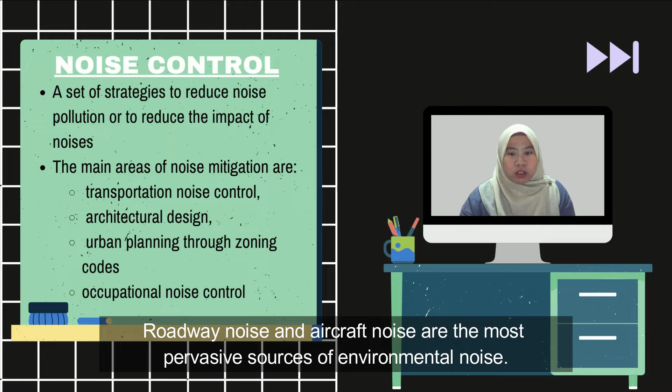The main areas of noise mitigation or abatement are transportation noise control, architectural design, urban planning through zoning codes, and occupational noise control. Roadway noise and aircraft noise are the most pervasive sources of environmental noise.

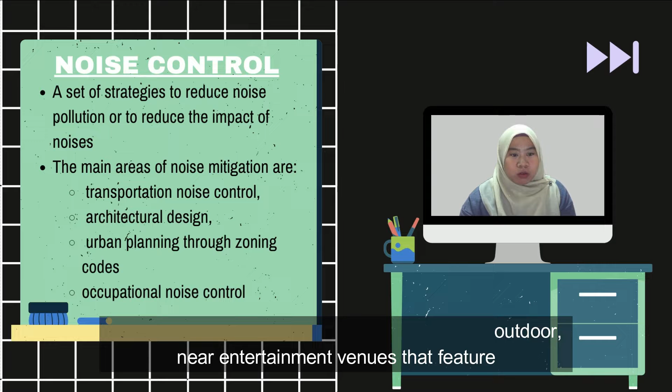Social activities may generate noise levels that consistently affect the health of populations residing in or occupying areas, both indoors and outdoors, near entertainment venues that feature amplified sounds and music, presenting significant challenges for effective noise mitigation strategies.

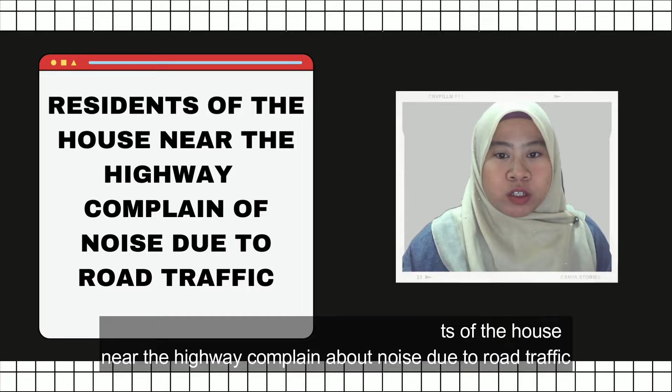Our first issue is about residents of houses near the highway complaining about noise due to road traffic. Traffic noise is one of the major environmental noise problems, with the main contributions coming from motorcycles, cars, trains, or other vehicles.

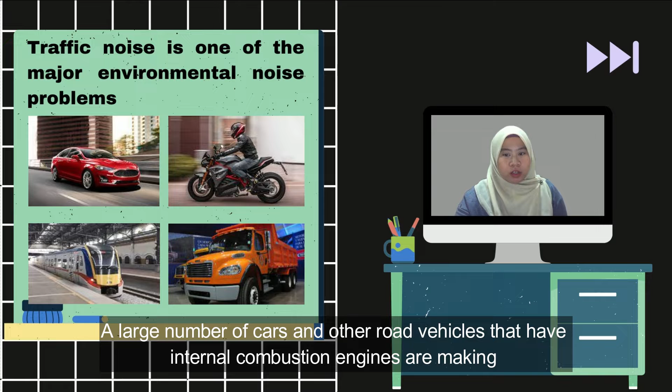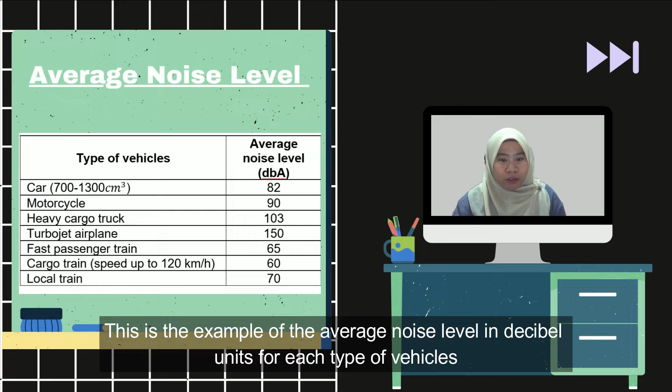A large number of cars and other road vehicles with internal combustion engines are making road traffic noise, which has led to noise pollution. This is an example of the average noise level in decibel units for each type of vehicle.

This road is also near a school, so the noise will interrupt the students' focus during their classes. Now I'm going to talk about the problems or impacts of the issue.

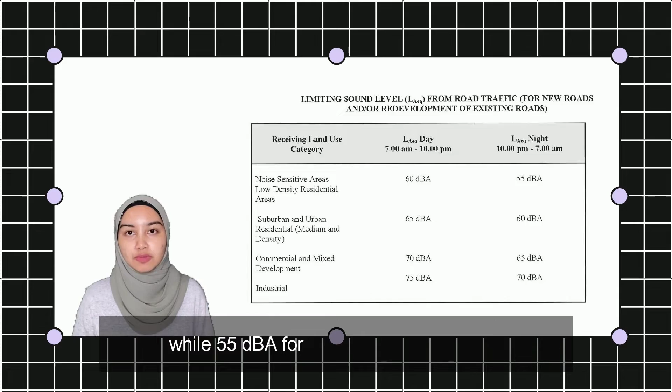For your information, the Department of Environment of Malaysia has recommended a limit for the sound level of residential areas from road traffic: 60 decibels during the day from 7am to 10pm, and 55 decibels at night from 10pm to 7am.

If you guys are still wondering what road traffic noise is, if you heard the noise I played before, I'm pretty sure you guys feel annoyed, right?

Based on several research studies, it's the main problem that residents near the highway face every day, from when they wake up till they go back to sleep. The sound of high-pressure horns, the speed of vehicles, turbo engines, exhaust, and tires from vehicles on the road are the main sources that produce the noise.

Residents may experience negative emotional responses in a day such as irritability, distress, exhaustion, and other stress-related symptoms. Next, since it's a highway, the noise may continue until midnight, so they will also face sleep disturbance due to the noise.

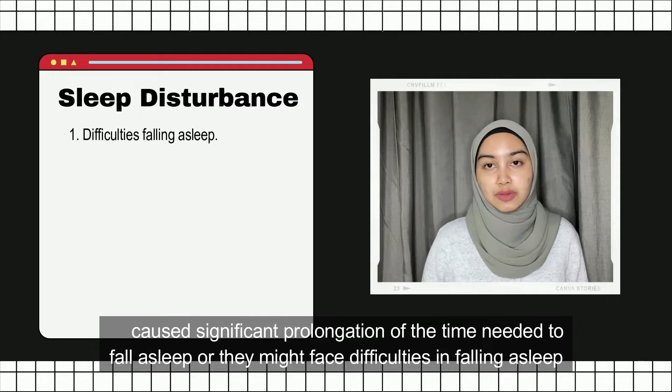It causes significant prolongation of the time needed to fall asleep, or they might face difficulties falling asleep, and impairment of sleep quality since they cannot sleep soundly, meaning they are not totally rested after a whole night's sleep.

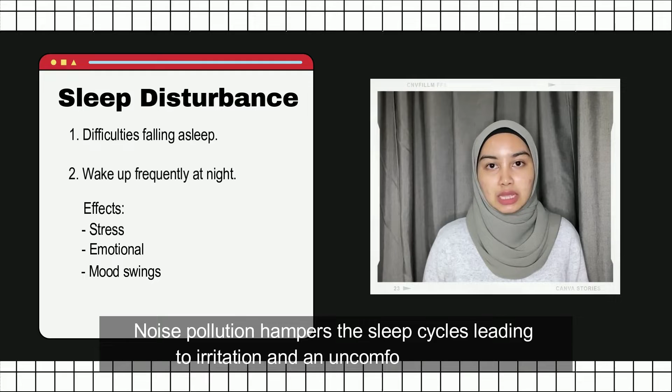Residents will wake up frequently at night due to traffic noise, resulting in after-effects such as stress, emotional issues, mood swings, and others. It might also result in fatigue and low energy levels throughout the day, affecting everyday activities. Noise pollution hampers sleep cycles, leading to irritation and an uncomfortable mind.

Since there is a school beside the highway, it's not impossible for students and teachers at the school to be impacted by the traffic noise from the road. The traffic noise might reduce a teacher's productivity and cause misunderstanding among students.

Teachers have to either stop teaching for a while or put in more effort, like raising their voices, closing windows, and repeating lessons. Traffic noise causes teachers and students to lose concentration, making them distracted and less inclined to work.

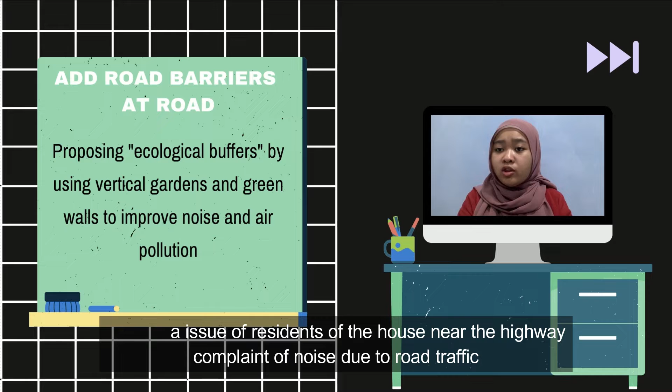We go to the procedure and guidelines: how do we control the noise, especially for residents of houses near highways? The issue is residents of houses near the highway complaining of noise due to road traffic. So how to solve it?

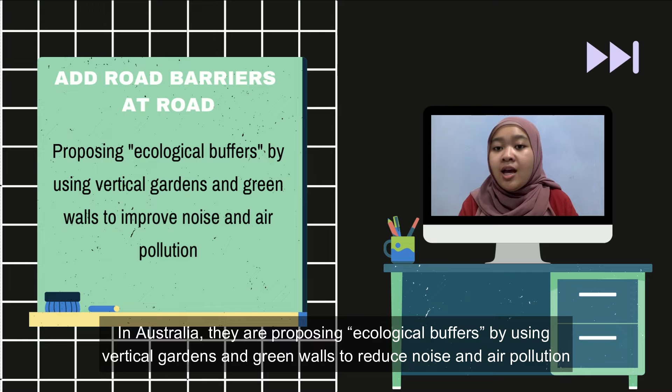Well, we can add road barriers at highway roads. In Australia, they are proposing ecological buffers using vertical gardens and green walls to reduce noise and air pollution. There is an example video of how wall barriers can reduce the noise and air pollution at the highway.

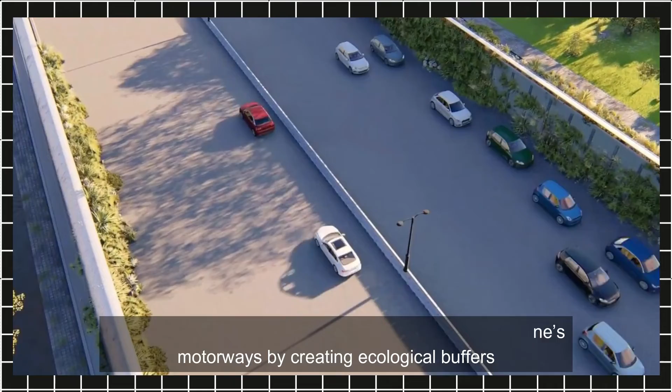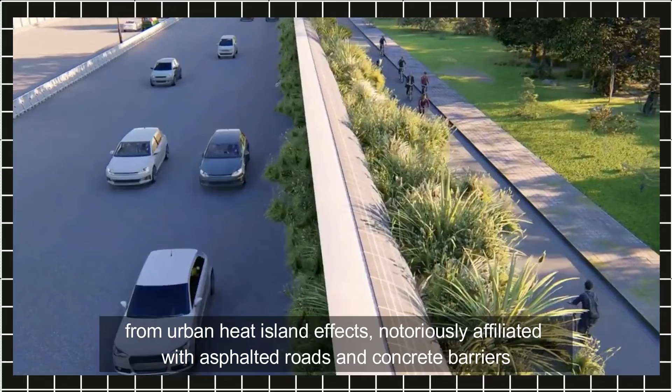This example video shows wall barriers at a highway near residential houses in Australia. Their project purpose is to retrofit and transform Melbourne's motorways by creating ecological buffers to address noise and air pollution, while improving liveability and protecting residents from urban heat island effects, notoriously affiliated with asphalted roads and concrete barriers.

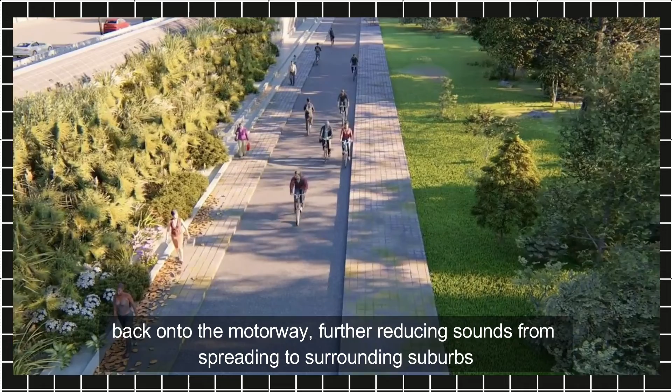To contain noise further, the noise barrier structures have been curved at the top to reflect the noise back onto the motorway, further reducing sound from spreading to surrounding suburbs. Next, install a soundproof fence.

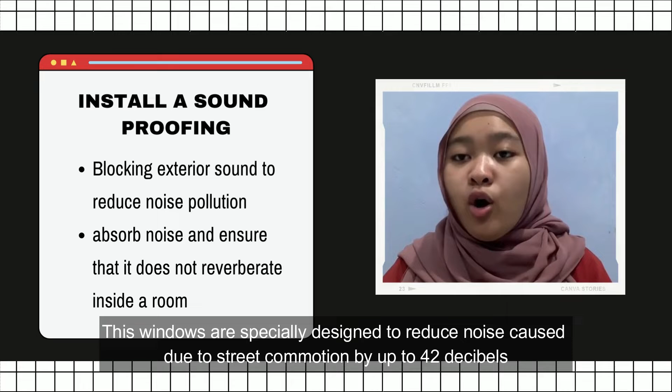For example, you can install soundproof glass windows. These windows are specially designed to reduce noise caused by street commotion by up to 42 decibels. This is possible due to the double glazing.

Two layers of laminated glass are fitted inside a single frame that traps external noise between them. Double glass acoustic windows absorb noise and ensure that it does not reverberate inside a room. These windows must create a barrier between noise and your ears to reduce the sounds. This barrier also has to be strong enough to fragment and capture sound waves.

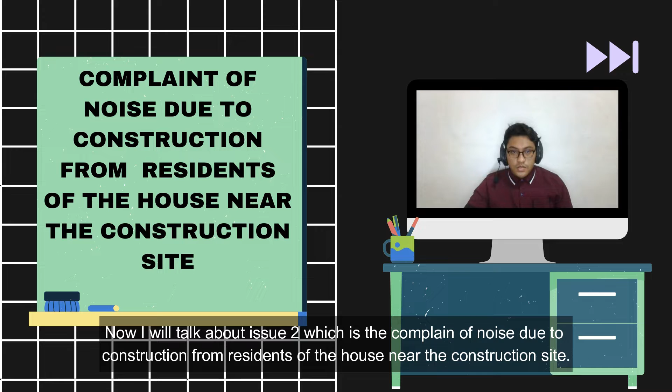Now, I will talk about issue 2, which is the complaint of noise due to construction from residents of the house near the construction site. For example, noises from machinery or handwork construction, such as piling, welding, knocking, hammering, or even material transportation. So, the residential areas will be disturbed and affected by noise from construction.

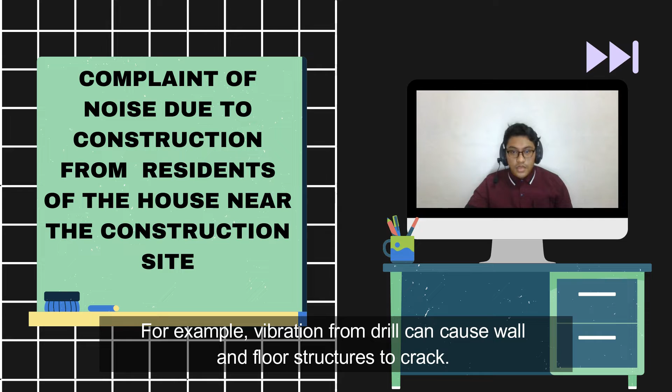In addition, construction close to the house can affect the structure of the house itself. For example, vibration from drills can cause wall and floor structures to crack. As a result, many residents complain about noise near their home to local authorities.

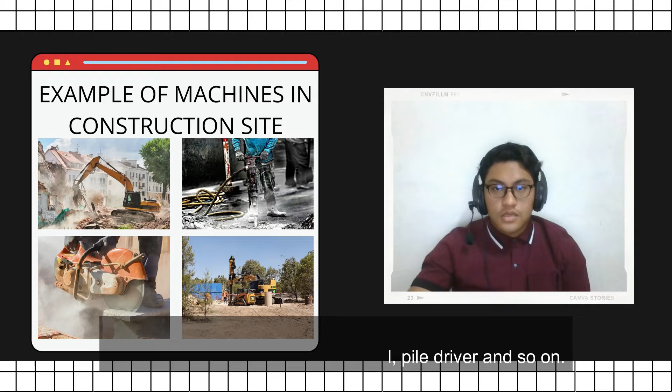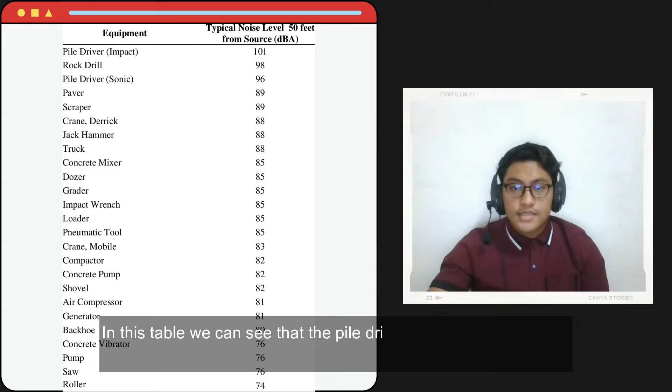These are examples of common machines used in construction, such as crane, drill, pile driver, and so on. The next is the level of noise emitted by the equipment. In this table, we can see that pile driver impact is the highest, at 101 dBA, while the lowest is roller, at 74 dBA.

As we all know, construction projects are notorious for producing lots of sound. So today, I'm going to be talking about this noise, and how it has an impact on people's health.

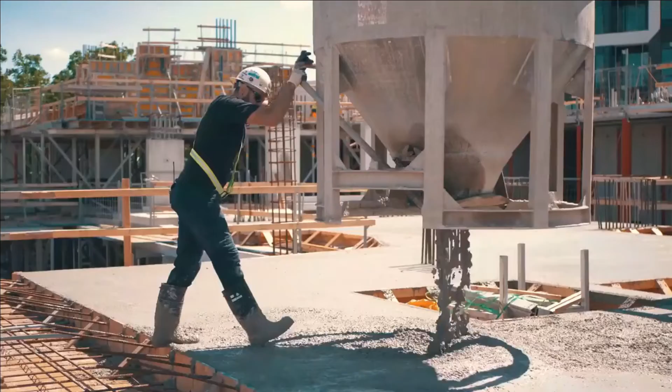Why is construction noise so noisy? It happens because of the nature of construction work itself, with lots of loud tools and machinery being used. Construction sites are constantly changing as the works develop and require different equipment. So with this, the types of noise and the volume itself will vary considerably too.

If you all wonder what construction noise is, you can hear from this video.

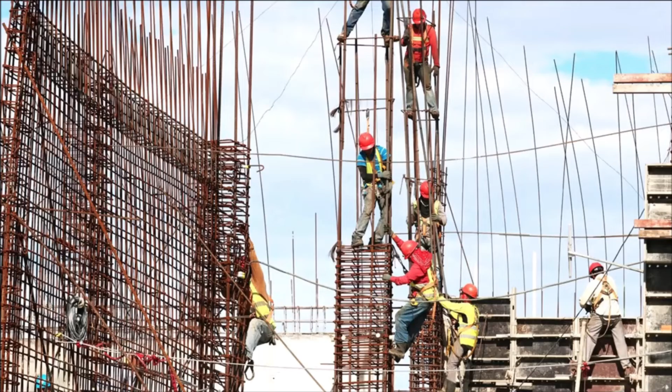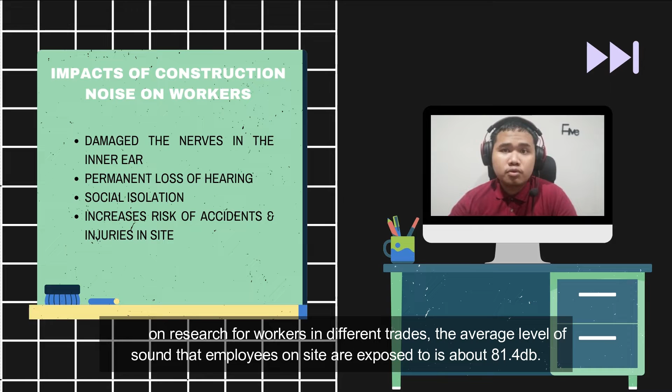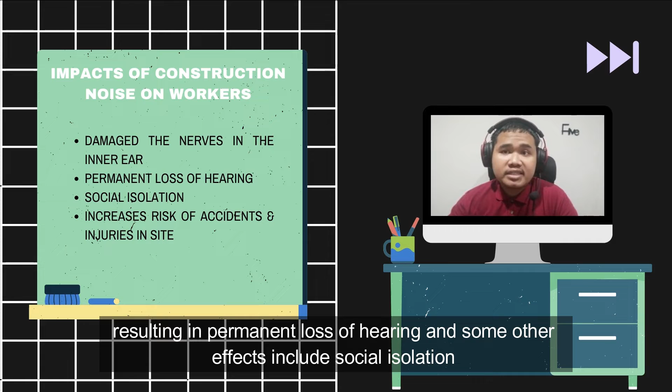Based on research for workers in different trades, the average level of sound employees on site are exposed to is about 81.4 decibels. If someone is exposed to sound that is both loud and long enough, it can damage the nerve in the inner ear, resulting in permanent loss of hearing and some other effects, which include social isolation because communication becomes a lot more difficult with damaged hearing.

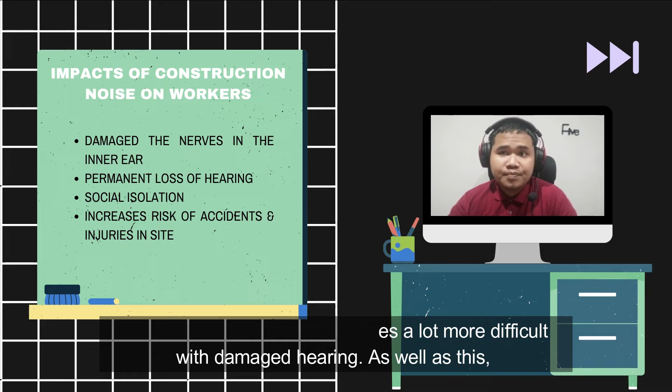As well as this, there is increased risk of accidents and injuries on site as people fail to recognize warning signals. Construction noise of course affects people who are not directly working on site too.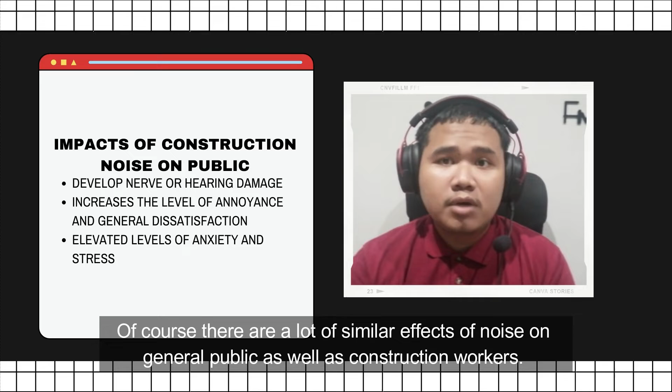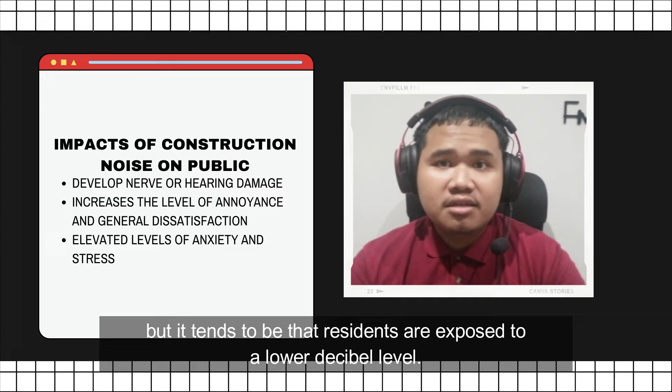Of course, there are a lot of similar effects of noise on the general public as well as construction workers. If it's too loud, they can also develop nerve or hearing damage. But it tends to be that residents are exposed to a lower decibel level.

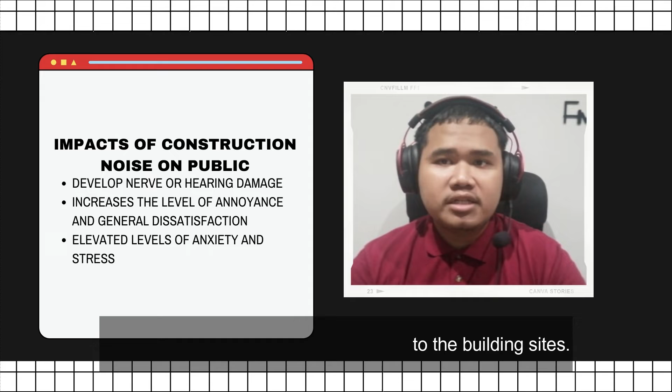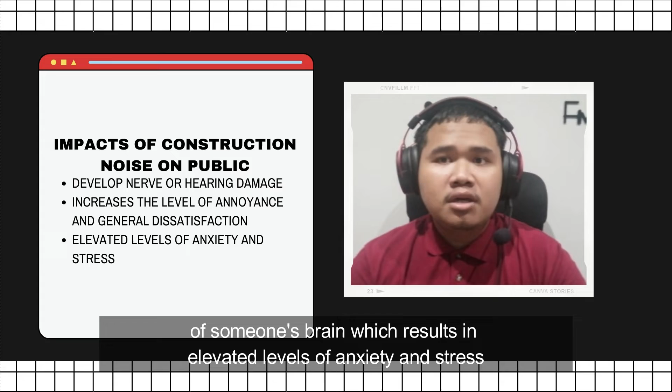In addition, according to some research, levels of annoyance and general dissatisfaction increase the closer that residents are to the building sites. When there is excessive noise, this can trigger the fight or flight part of someone's brain, which results in elevated levels of anxiety and stress.

For the first guideline, using quiet equipment, the first step in providing quiet workplace equipment is to make a strong effort to have equipment purchase specifications include noise emission limits.

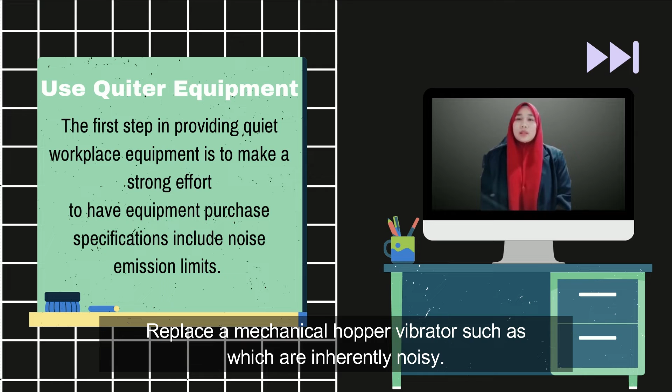For the second guideline, using quieter process, changing the process can be one way of getting to grips with noise generation. This would require one to be aware of the availability of quieter processes for both actual production work as well as material handling. The following are several common examples.

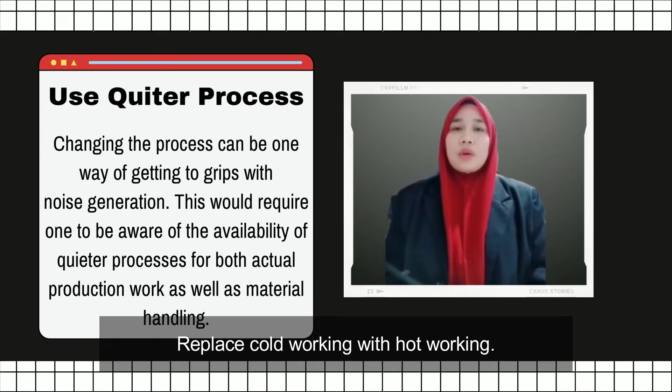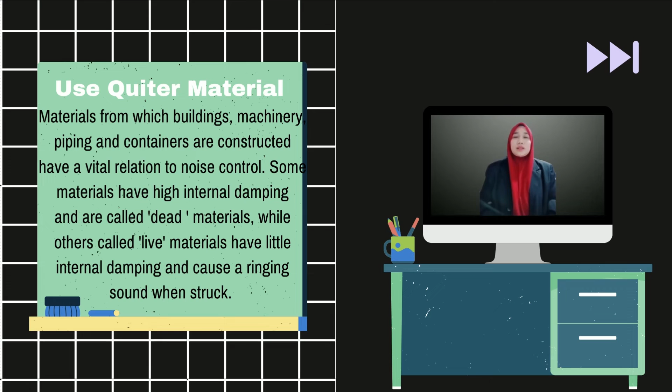For the next guideline, using quieter material. Material from which building machinery, piping, and containers are constructed have a vital relation to noise control. Some materials have high internal damping and are called dead material, while others called live material have little internal damping and cause a ringing sound when struck.

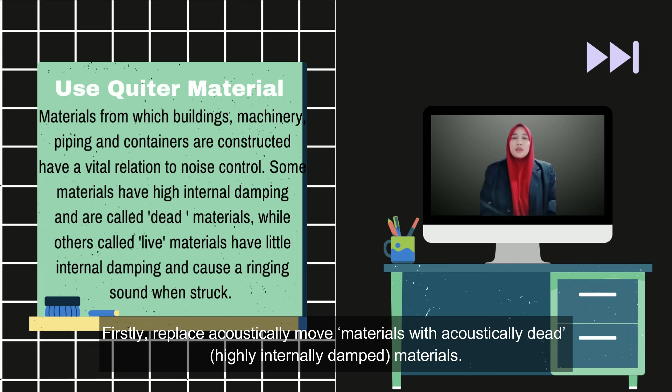Some ways of using quieter materials are as follows. First, replace acoustically live material with acoustically dead, highly internally damped material. Second, replace steel wheels or hand trucks with rubber or plastic tires. And last, replace steel gears with fiber gears.

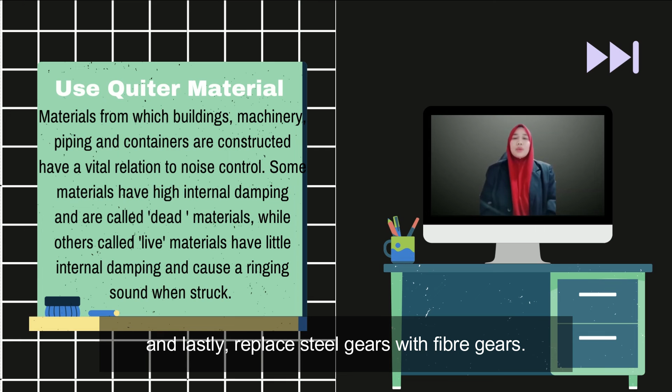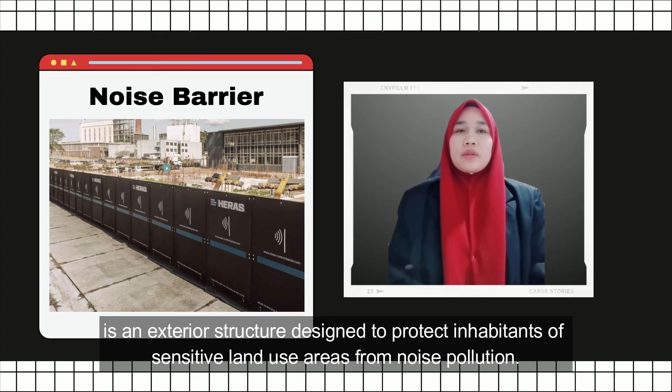And for the last ways, can use noise barrier. A noise barrier, also called a sound wall, noise wall, sound berm, sound barrier, or acoustical barrier, is an exterior structure designed to protect inhabitants of sensitive land use areas from noise pollution. Noise barriers are the most effective method of mitigating roadway, railway, and industrial noise sources, other than cessation of the source's activity or use of source control.

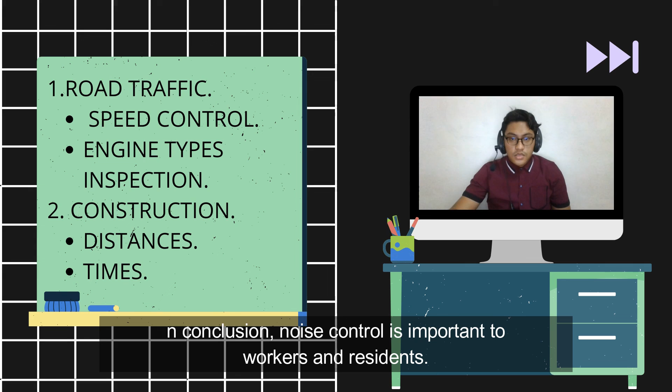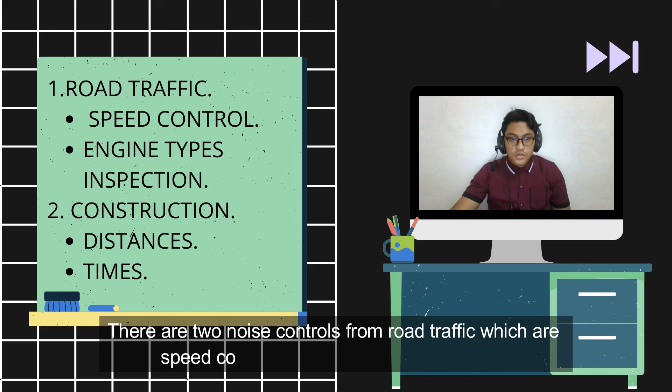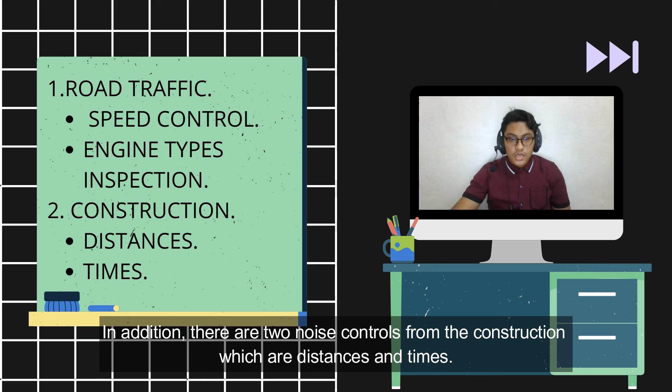In conclusion, noise control is important to workers and residents. The authorities need to emphasize noise control such as in road traffic and construction near residences. There are two noise controls from road traffic, which are speed control and engine type inspection. In addition, there are two noise controls from construction, which are distance and timing.